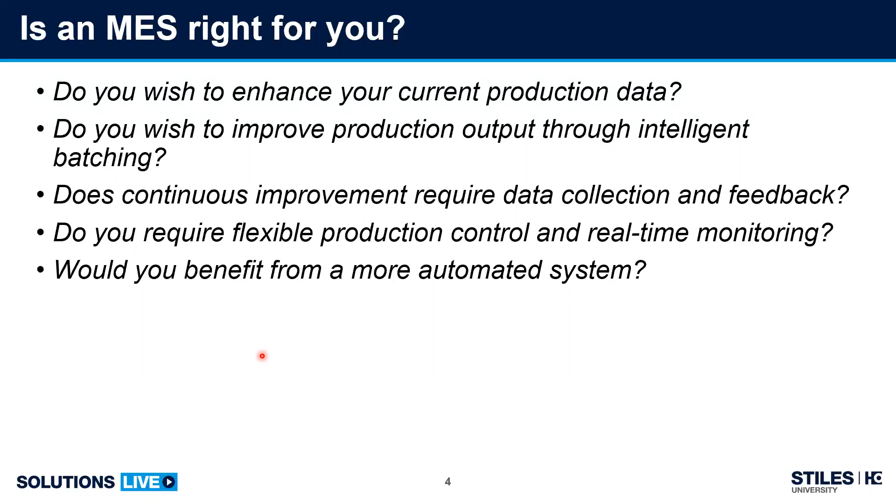Is your annual sales expanding beyond your current manufacturing systems, software, or production machinery? People often ask, at what volume level does an MES system really become required? That's a good question. I try to put a dollar value on annual sales, but that's difficult because different companies work differently. We'll discuss some of those topics too.

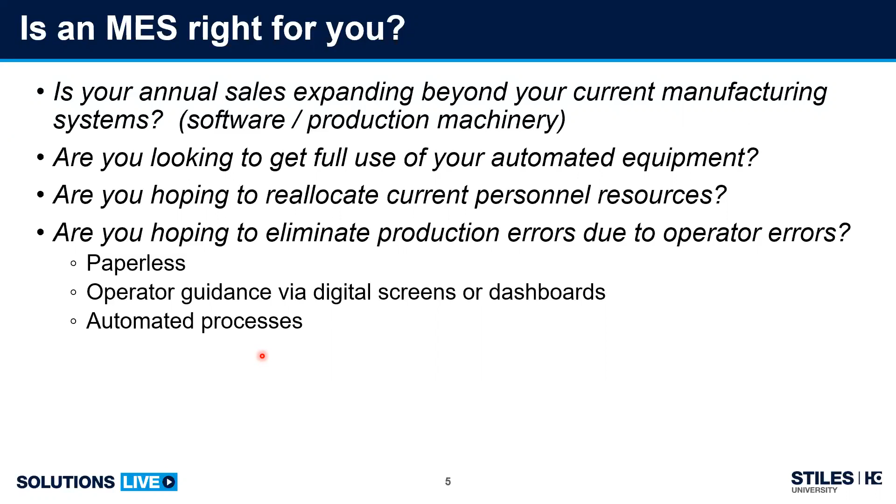Are you looking to get full use of your automated equipment that you may have already purchased from Stiles Machinery? Are you hoping to reallocate resources that were replaced by these machines on your floor? And are you hoping to eliminate production errors due to operator mistakes? Go paperless, have operator guidance via digital screens or dashboards, and automate your processes.

So what is our MES solution? As I stated a moment ago, it's ControllerMES. And ControllerMES is a manufacturing execution system.

Our software and our system is a modular system. It's also very flexible and totally customizable. And understand that this is not a system that's just out of the box that I can sell you and you plug it in and it works.

This is a project-oriented solution. That means we build the solution for your manufacturing process. We sit down, we design the scope that you require for your manufacturing and your software needs, and we deliver a solution for your requirements.

And where does basic MES fit within the guidelines of your manufacturing? We look at this in two ways: you have the vertical method and then the horizontal method.

And once it hits this particular line of your production control system, in this horizontal area, this is where ControllerMES lies. Basically, ControllerMES manages your storage system of materials, whether it's an automated STORETEC IntelliStore system, whether it's cutting on a panel saw, separating on a nested-based router, edge banding, whether it's a batch size 1 totally automated edge banding line.

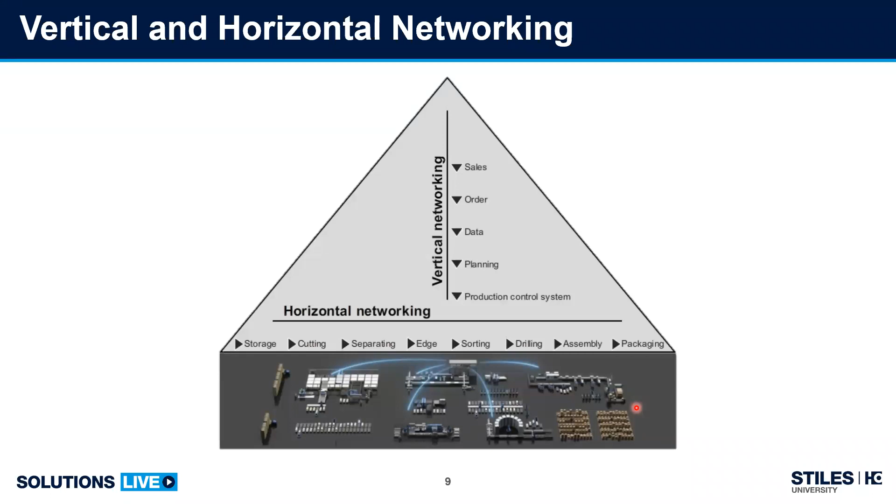So our MES system, as soon as it's loaded on the truck, is when we pass that data off to the next system. I like to show this screen quite a bit.

This shows a lot. A typical manufacturing methodology today is you normally have some type of point of sale system. You're normally running some type of a CAD/CAM or bill of material generating system, whether it's a spreadsheet or a more complex order entry system or a design system, but you need to get a bill of material. So running this normal top line here, you come in from sales into CAD/CAM.

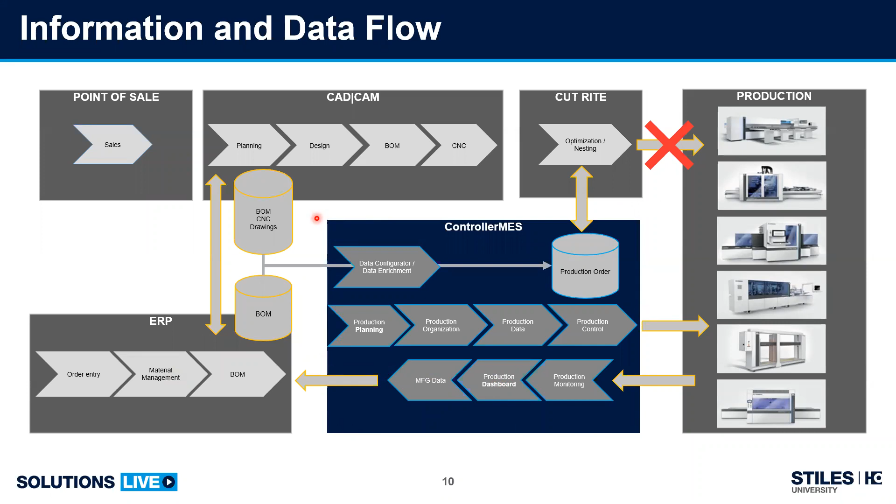What I call ControllerMES at a glance, as an overview: some key features, as we talked about briefly, is being able to create production batches, either automatically generating batches based on criteria or rules, or using dynamic filters within ControllerMES to filter the jobs based on production date, also capacity planning to build those batches.

So that when you release them to the floor, it's flowing your parts and products in the most efficient method, because we have visibility to every aspect of your production so we can see and predict bottlenecks before you release them onto the floor.

The second big feature is rework management. That's another option we'll go over about the features later.

We're also within MES able to generate data for batch size 1 edge banders. If you have an automated edge banding system that requires programs or macros to run, ControllerMES will be able to generate that for you and pass it to the machine.

Also allowing what we call an edge preview, which gives the operator the ability to know what edging is required to bring up to the coils and magazines, so he can change out ahead of time and pre-plan for the day's production.

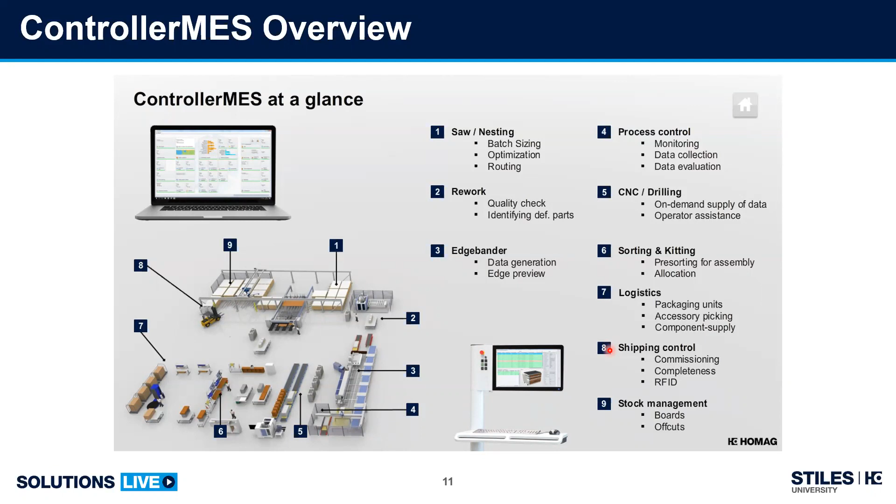So in a general overview and flow, as we mentioned a moment ago, we import data, your bill of materials, first into MES. It organizes all of this data and validates that we have everything we need to run the machines, because you may be designing a new product or a one-off custom part that still needs to be designed, or an engineer may be missing one part. So when your cut list or bill of materials gets imported into MES, we validate it and import it, and if something's not available, we stop and give an error message before it hits the floor, so the machining program isn't sent to the machine.

Again, creating the dynamic optimization batches, we then allow you to identify the parts via barcode labels, transferring the programs to the machines only when they're required. So we don't need to download weeks of production or store them on the machine for weeks at a time and risk them being accidentally deleted. We're always making sure the right programs are on the right machine at the right time. We also talked about generation of edge banding data—that would be in there too.

We supply data to the CNC machines. Now, completion control makes sure that we have all the part components required for a particular area. So as parts go through the bander, or as you're monitoring a job, we want to make sure they're complete before it moves to the next station or into assembly.

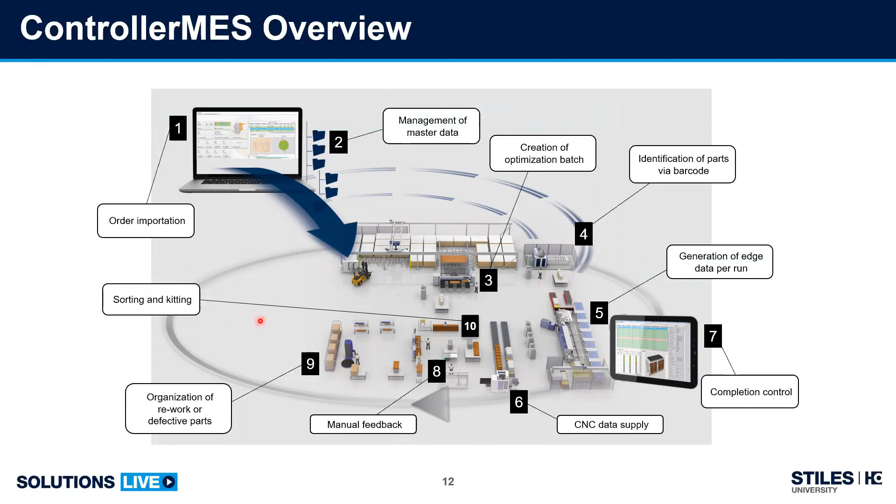Another important thing we talked about is rework or defective parts. What happens when a part gets damaged? We manage that—we can scan the part, and we give screens on that, which I'll go over in the features later on. And then we get into sorting and kitting. So this is a good overview of the process that MES would manage.

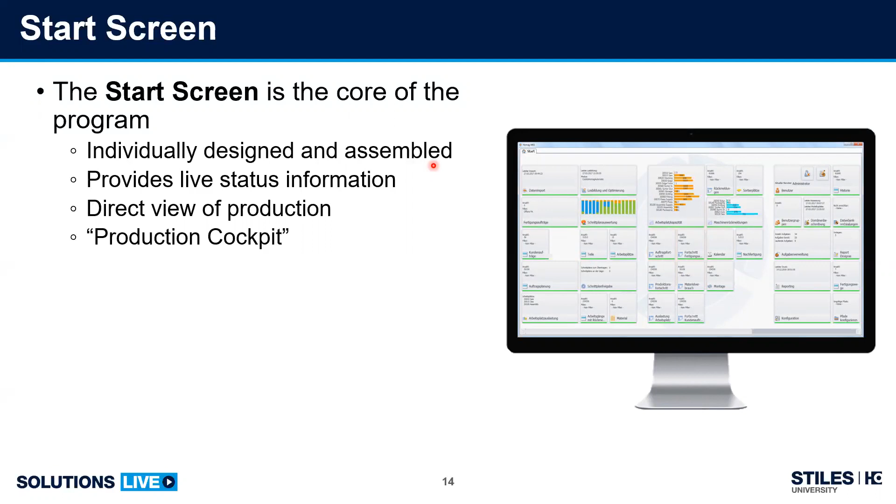We talked about data validation and data enrichment. So when you have a bill of materials coming into MES, the first thing we do is double-check and make sure the data is as accurate as we can possibly make it based on rules. So if data is coming in with a lot of zero part quantities, zero sizes, or it's calling for certain machining programs that are missing, MES throws up a flag and stops it before you even get it into a production order.

So the data configurator can be set up to enrich the data that comes in, meaning we can add part routing information. If your ERP system already has production routes—telling it to start at a saw, then go to an edge bander, then a CNC machine, then assembly—we can set up alternate routes. So if a machine is down for any reason or over capacity, you can have alternate routes for those programs. That's all handled in our data configurator, and then that gets passed over into our production order screen.

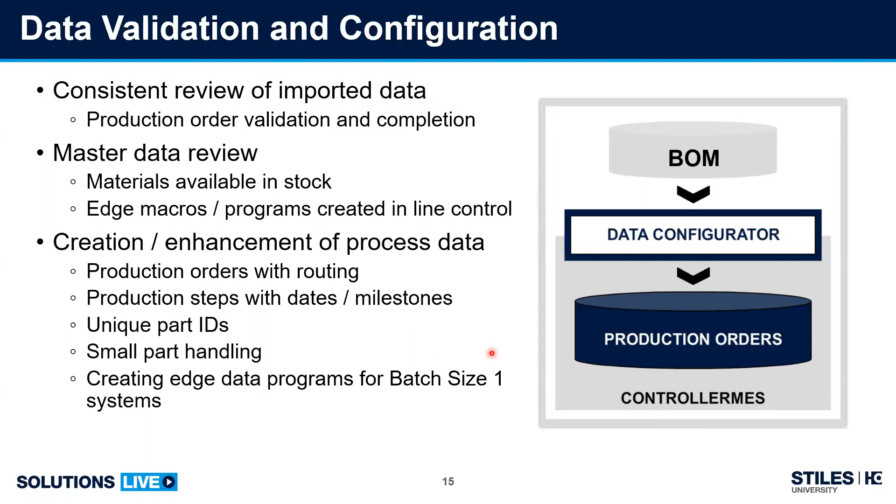This is where we began to build those dynamic batches that I was talking about. The first thing you want to see is what happens if I batch these particular jobs together, and how does that hit the capacities of my bottleneck machines? In this example up here in the top left, I have a saw, an edge bander, and maybe my packaging area. As I'm building these batches together, it shows in different colors where I'm at on a given date for capacity, helping you balance the workload of your jobs.

With this, we automatically run the optimization or the nesting behind the scenes. So once these batches are created, we just click a button and go through these steps. It will generate the optimization, and this is all done behind the scenes. Then you can monitor what has been released to the floor, what's in production, what is planned for production, again with different colors and different machines, so you can see how it affects your given production date.

We can also see the cutting patterns back into MES, just like you would view inside of the optimizer itself. But the difference here is we can also set up rules that if a particular optimization doesn't meet, for example, a minimum yield threshold. Let's say I set up 70%. If it doesn't hit 70% yield on a given job, it can throw a flag up for me. Otherwise, it may be automated. So it would throw up a flag and say, hey, the batch that you just selected is below that. What do you want me to do?

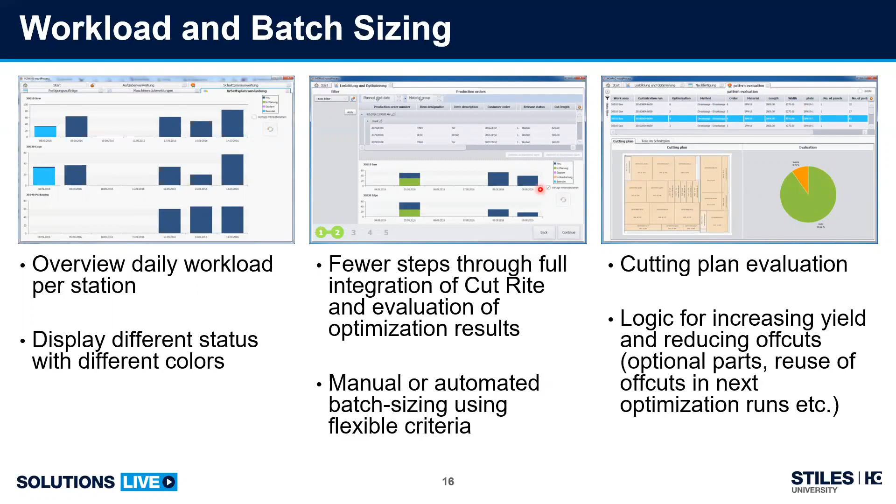But one of the things that we are beginning to see quite frequently in our industry is called batch size 1. So the days of producing 50 or 100 of a given item at any given time are becoming less and less common. Today, in much of our manufacturing in North America, we're seeing the requirement that I need to produce 1 or 2 of a given product. So batch size 1 requires different methods of optimization, different methods of monitoring.

A lot of the systems that exist today, for example, if I needed to build 10 of them in one case and then 1 in another, I may have a quantity of 10 of a part. Well, in a batch size 1 operation, we create a unique serial number for every part, so everything becomes a quantity of 1. Your existing ERP systems, your data systems, may show I need 10 of a given item. MES automatically breaks that down into a quantity of 1.

And then we generate the necessary data all behind the scenes, so you don't have to do this up front. Then we can track and monitor part by part, product by product, and job by job through the factory floor, no matter if it's a quantity of 1 or a quantity of 100. We still manage it the same way.

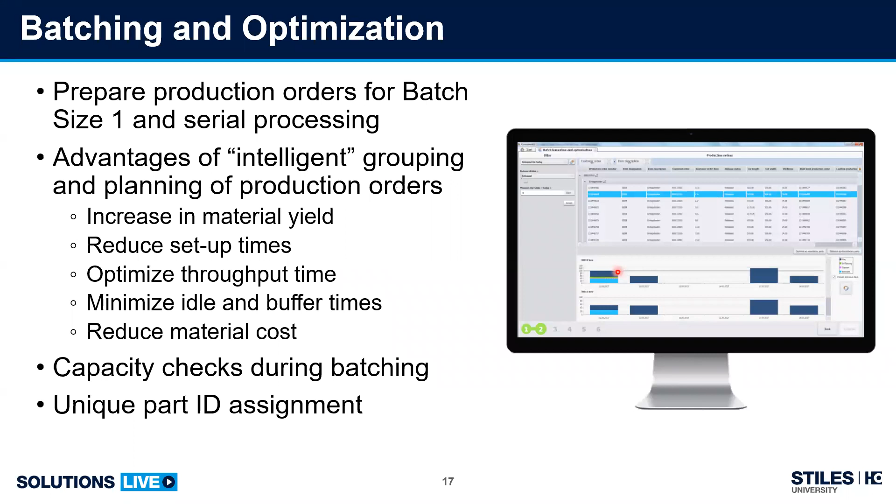Now we get into the data analysis and evaluation of your production. As orders are being produced on the shop floor, you can see the progress of those products and the completion by product type, by order number. Then we collect all this information, and you can see the capacities on the machine, what the material consumption is at that given time, and we track this information long term.

What does that do for me? That allows me to make smarter decisions in the future as I'm manufacturing similar type products or continuing to be dynamic in the type of products I manufacture, because we can have all this information stored about what stations and what machines, how many defective parts were produced over a period of time and why they were defective.

We have the chronological progress feedback from different areas. Again, all the machines will have automatic feedback, but we can also set up stations so you can begin getting feedback from the manual stations that you may have never had information before, where it's kind of like a black hole in your factory where parts may get lost. This allows you to have a dynamic and total overall view of your entire production and help you identify bottlenecks before they occur.

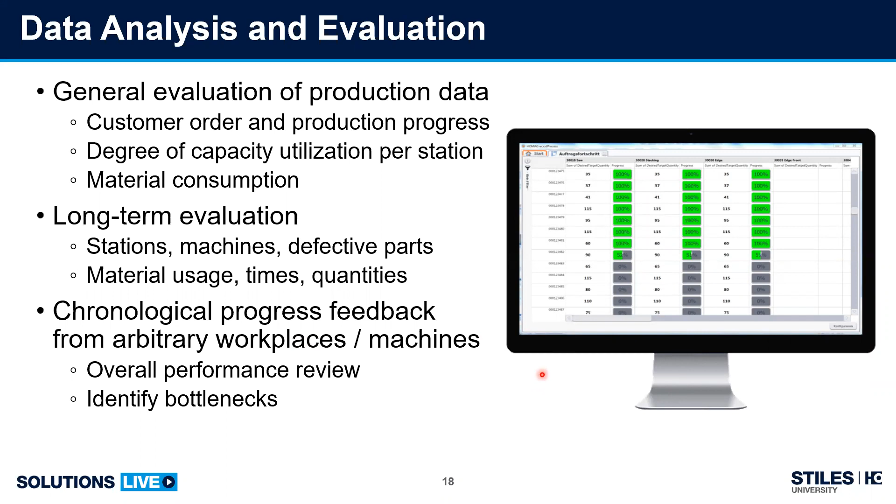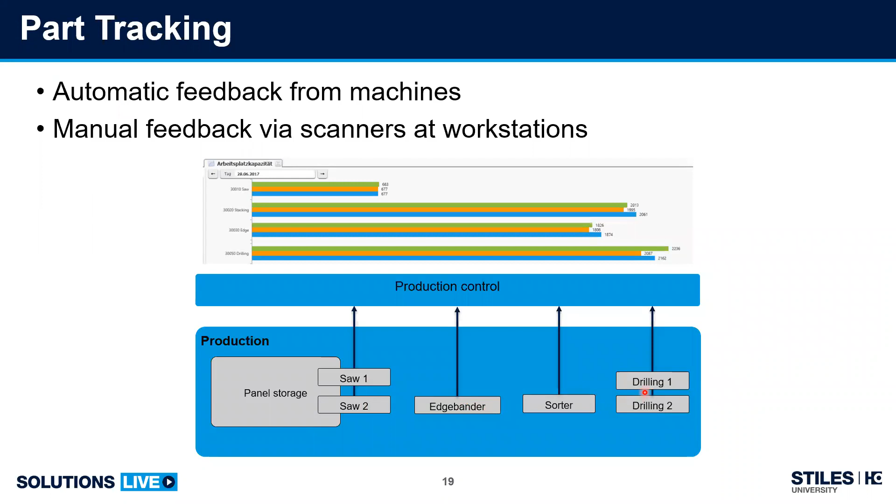Again, by part tracking, we will be collecting this information through each area, tracking where all the parts are at any given time.

And then here's the flash, here's the glimmer: this is the dashboard. As you walk through some manufacturing facilities, or even some Stiles offices, we see dashboards of our key performance indicators. This is something we can create within ControllerMES to view at different work centers.

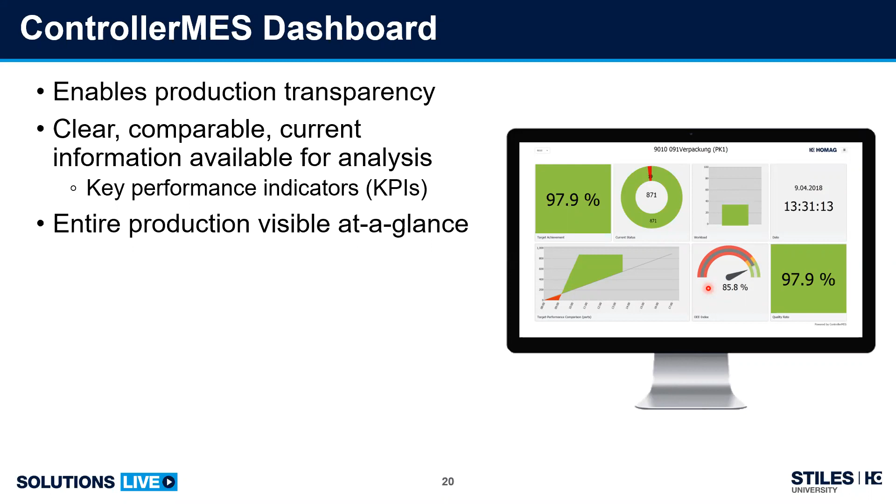So as people see where they are in their production processes, or see that the stations or workstations ahead of them are ahead, that can mentally prepare these guys to work a little bit faster, a little bit better and more efficient, so they can be on time for your customers. These dashboards are very critical for you as owners or managers of your shops, but these views can also be shareable to your customers to see where their orders are.

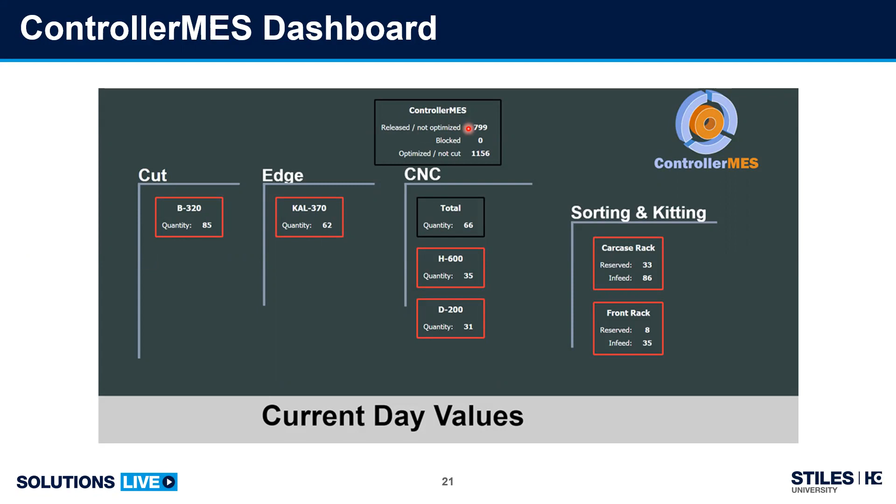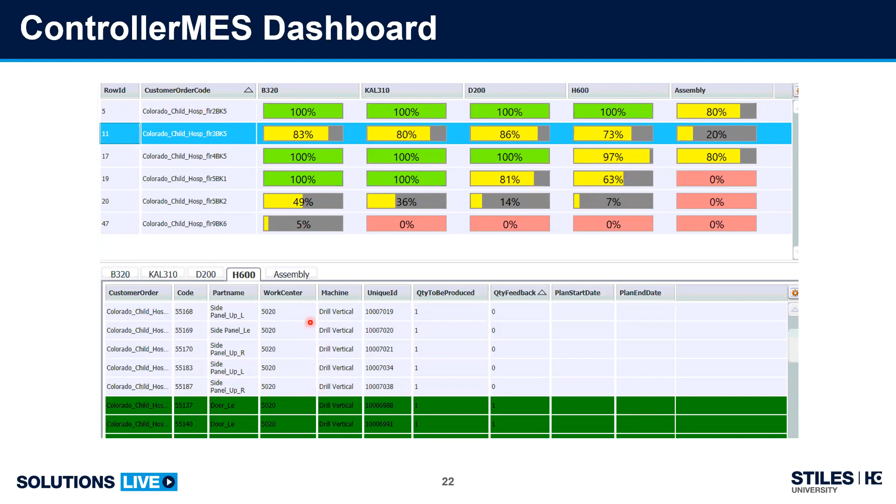Again, this helps to reduce paperwork. The more information, whether it's visual or legible, on the label you have, the better. In general, this information is standard, and we can get this and pass it today.

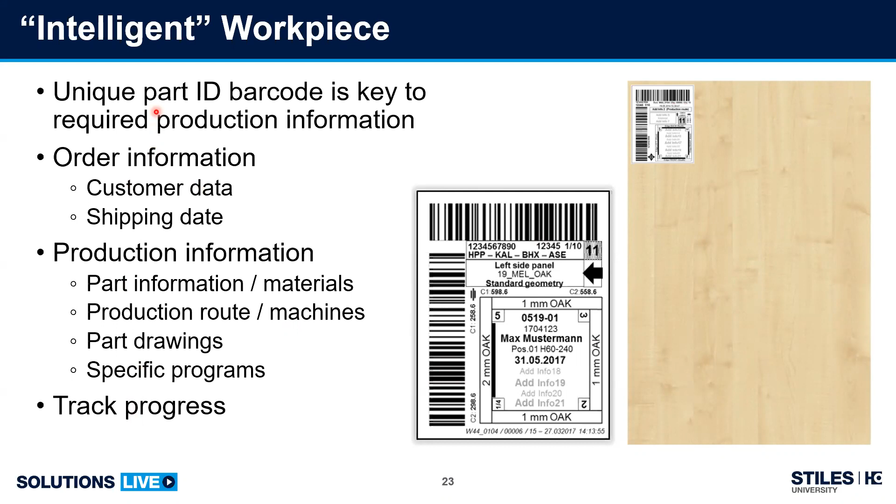What we can do with ControllerMES is enrich that information. The first thing we talked about is generating a unique part ID. So if I come with my end panel or left side panel in this case, and I needed 10 of them, I then create a unique part ID specifically for that.

Now I've got two barcodes here, same barcode, just in two different orientations. So as I scan into an edge bander, as I rotate the part around, the scanner will automatically be in the orientation that I'm scanning. That's one thing that we would do automatically in MES.

The second thing is we can produce the processing routes. Some ERP systems already have a process route, that's great if you do. If you do not have that, ControllerMES can do it for you. Based on a set of rules for a given part type, we can create something like: this goes to my saw, then the next station is my edge bander, then to my CNC machine, and then it goes directly to assembly. Whether it's in legible text, letters, numbers, or colors, doesn't matter.

We can produce these routes by whatever is required by that part, as well as alternative routes. So if I have multiple banders or multiple CNC machines that can process that, we can also list those below or dynamically change that on screens on the shop floor.

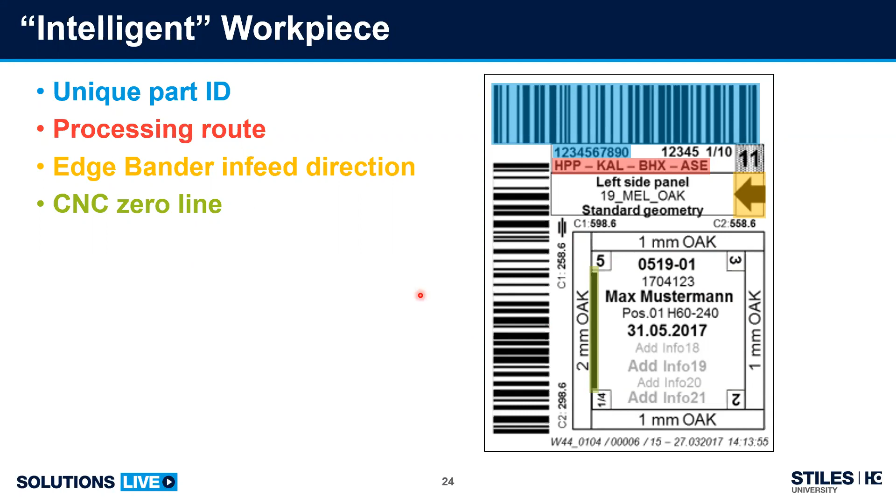As you'll notice here, this particular part had 5 edge processes. So we do a sizing on one, and then edge 2, edge 3, edge 4, and then we can show the picture of the edging diagram. Just more information we can show about the data enrichment we can do for the operators on the floor.

One of the other things we talked about earlier is how do you handle reworks or damaged parts? This is one of the key features that comes up in my discussions with companies. Some companies have an entire separate area set up to handle reworks. Some have to take a part back through the original machines it began and was processed on. Depending on what phase they're in, if it's in assembly and the job is getting ready to be loaded onto a truck and a part gets damaged, that truck is waiting on me, so I have to have that part now. They have to go interrupt other production on all these other machines. What effect does that have, and do you know later on how much money that cost you?

So rework management is very important. With this system, we can set up terminals, any of our MES terminals, with a dashboard that you can simply open up and scan a part. It can be used simply as a quality control check, say every 100 parts run through my bander I want to check, or it's strictly for rework.

When a rework is scanned, I basically have a reason for what happened to it, and second, what needs to occur to reproduce this. Do I need to cut it from the beginning on a router or a saw? Or do I just need to run it back on my CNC machine again because maybe a bit was broken on the CNC machine, just missing a hole?

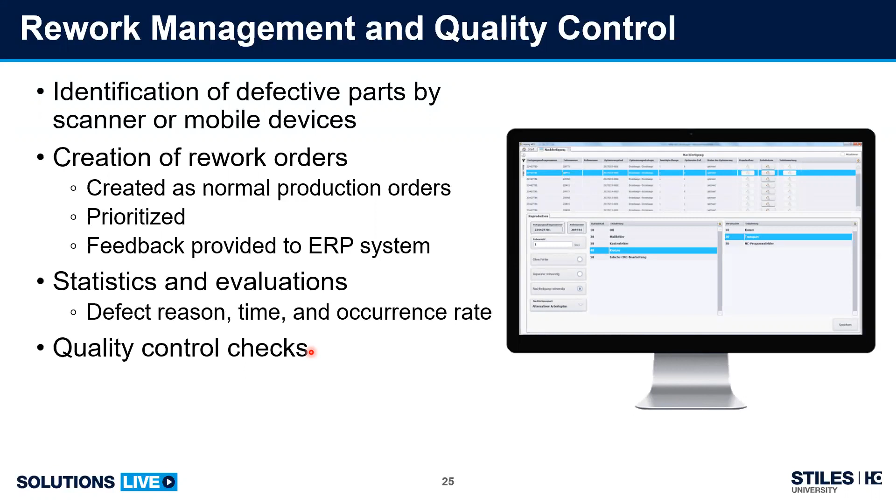We also get into what we call the production logistics or worker information. So we want to basically take digitization of production—that's hard to say, I won't try that again. So, given the information available at a glance, this is where, again, we reduce paperwork.

We want to give the operator what he needs when he needs it. So if he is at a station for assembly, for example, he scans a part. He sees that product that I need to assemble. He sees that hardware that I need to put together, and it tells you on the screen what's missing or what I need to get, what's already been produced. If something is missing, it's in rework, so then he can set that aside and go next. Worker information is very critical and is a big part of our MES system.

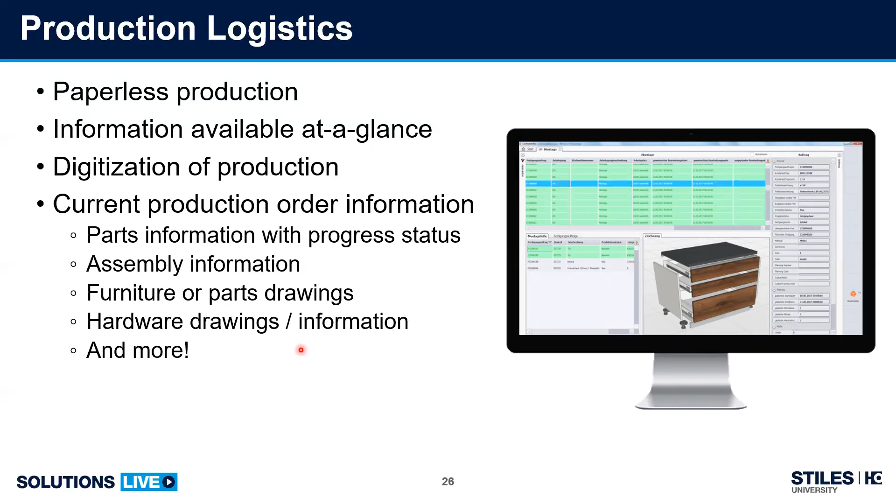So when the jobs were released to the saw, whether it's a CNC nesting machine or a saw, it was robotically handled and then destacked. The AGVs are able to come over, and once a stack is complete, ControllerMES would then send a signal to say, okay, go pick up this stack of parts and take it over to this particular area and drop it off for the next operation. So it controlled the AGV information of when to go get it and where to go take it to—that's what we call the transport orders.

And then it manages the parts that are in there, so it can then set up the next machines in the line to know exactly what was produced and what was just delivered. And again, based on the capacity-based planning, this all works together and is driven by our ControllerMES system.

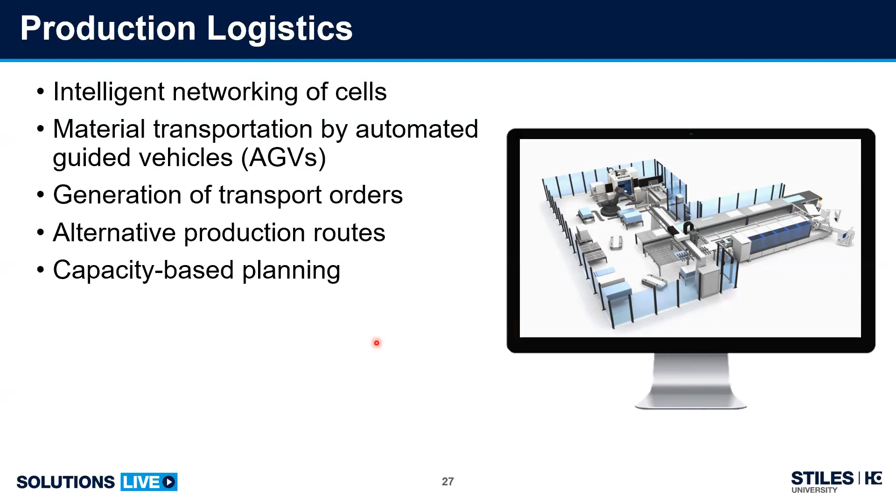Now, another one, as we talked about, is the flexible sorting or shipping organization or kitting. This is something we recently worked on. They don't have automated guided vehicles—they basically have panel saws sitting next to an edge bander, then multiple CNC machines, and a second area for their assembly.

And what we do is, as the parts come off the saw, we indicate which cart or which pallet to set the parts on, so that they're organized by the next work process. So then if they need to go to edge bander A or edge bander B, they're divided at that point in time by color code information on the label.

Then that cart or pallet is taken to the next station. Once they run through the edge bander, they're resorted again by the screen, saying, now I need to take these two—these go to my horizontal drilling machine, these parts go to my vertical machine, this one goes to a different machine because it can do both.

Then as they continue to go through and cycle the sort throughout the factory, we combine them all back together again as they go through and into the assembly area. So that's one area of sorting.

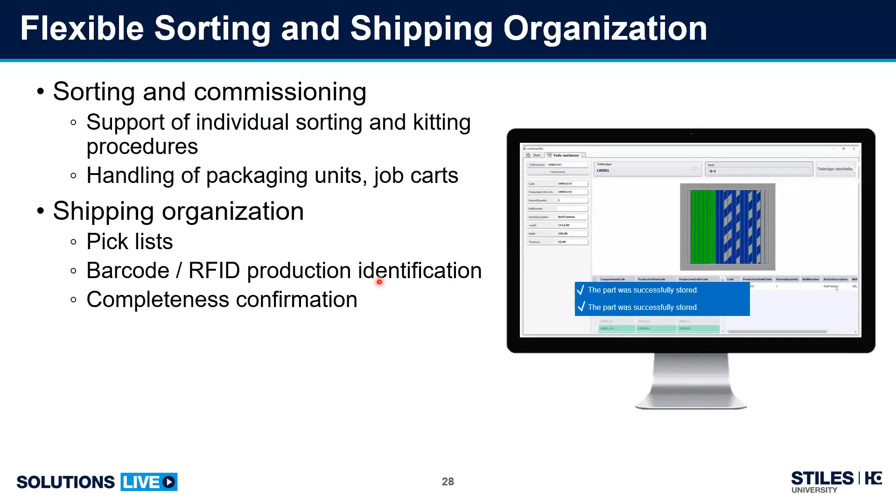What are some of the benefits of having an MES system? Well, we talked about this a lot, and I'll recap this. This is data—everybody has data. You need information to go to the shop floor. As I've talked about, we need the right information at the right place at the right time, and we need to make sure that data is valid.

Anything MES can do rule-wise to assist and to enrich or enhance information, because some systems you have can only generate certain types of information—that's what the software does, that's all it can do. It may not have the information for the edge bander that you need, so we can enrich that data.

We can also manage the fact that we can get the programs to the floor when they need it. This really eliminates the operator from deleting, manually editing, or monitoring the programs on the machine. As soon as that job is being produced, we have all of this information on a SQL database on a server ready to hit the floor.

We also talked about planning and how we can flexibly, dynamically, and intelligently create the most optimal batches to go through your production, which I think is a very important part of an MES system. We can check the capacities of your different machines based on rules, and then monitor the progress and control of your production.

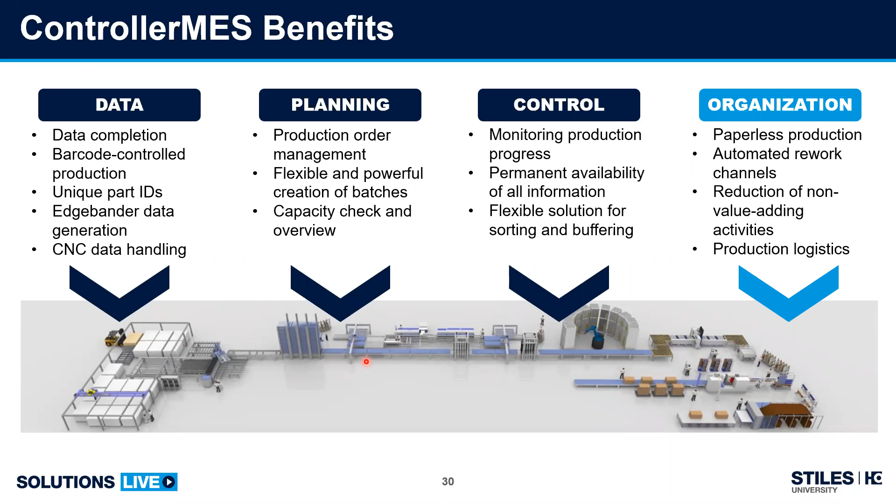Again, data quality is a critical component. As we all know, we're getting into batch size 1 production. Through MES, we can help aid in that. If your current systems are not capable of doing that, we can produce a quantity of 1 as easily as we can a quantity of 500.

Saving time on the shop floor, allowing this flexible batching and direct integration into the optimization or nesting system. We can improve those optimization results by giving you foresight ahead of time by batching different orders together and seeing how it affects your production before you release it to the floor. Quick identification and processing of rework parts—components that are very critical.

Tracking of production and ultimately increasing productivity. Now, with that being said, any questions as you go through—but I do want to leave you with a quick video. This next video shows the start to finish and what MES can do for you.